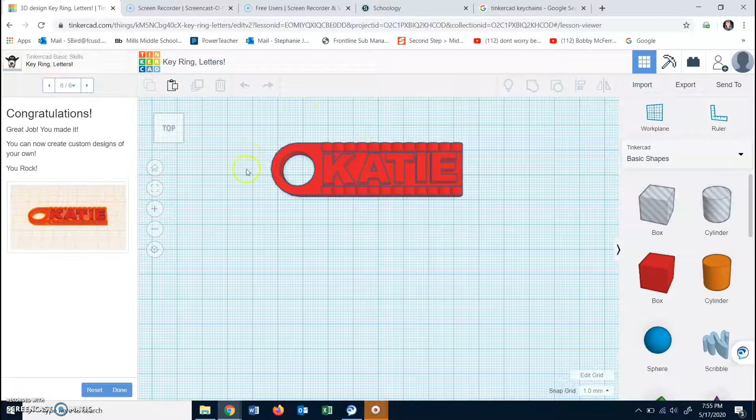And when we made this for the tutorial before, it had the name Katie on it. But I'm going to just, let's see, we'll click done here. I can modify it, or I can start a new one, reset, and work from there.

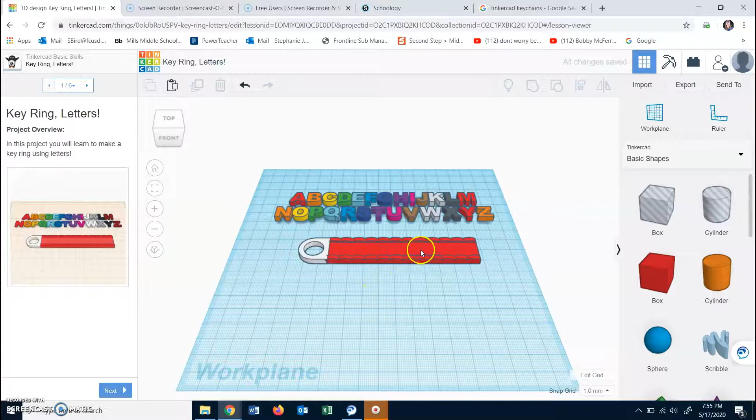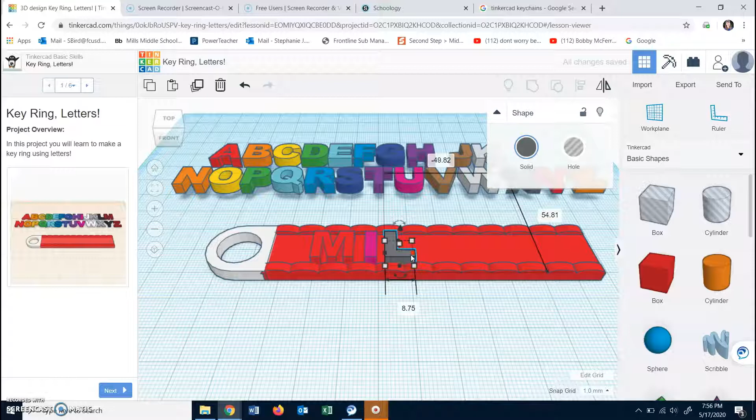So let's say for this keychain, I want to make one for, I don't know, maybe I want to make one for Mills. So I'm going to come and grab the Mills letters, M-I-L. There's only one L, so I'm going to grab another one by saying Control C for copy, Control V for paste. Oops. Undo. Okay.

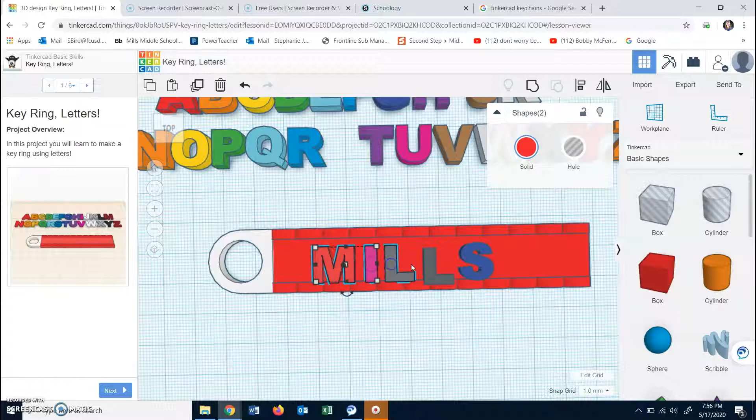Now I want to make sure I center these letters, so I'm going to select them all, and I'm going to click Shift and grab all of them, and I'm going to align them. And actually, there's a way, if I wanted to use the text tool instead, I could make sure that they were spaced out properly, but for this purpose, I'll just keep this.

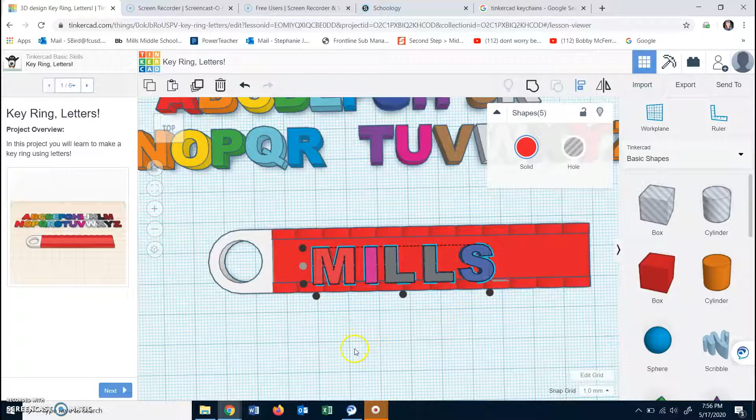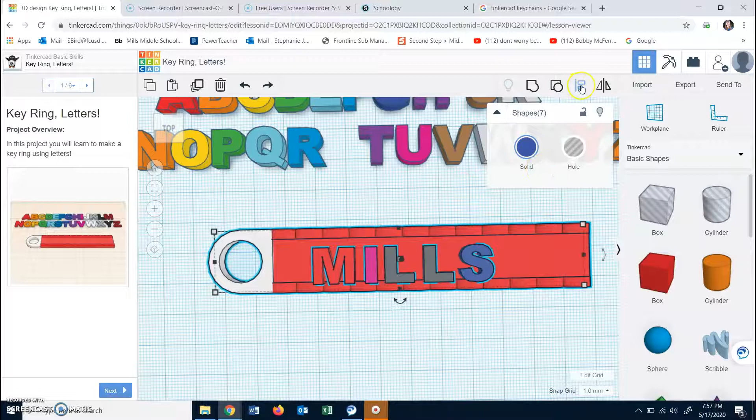I'm going to click Shift. I'm going to grab them all again. Oops. Undo. Okay, I'm going to grab them all again. And I'm going to grab the keychain shape. And I'm going to come up to Align again and make sure that I have them all centered this way, so that my letters are evenly spaced on there.

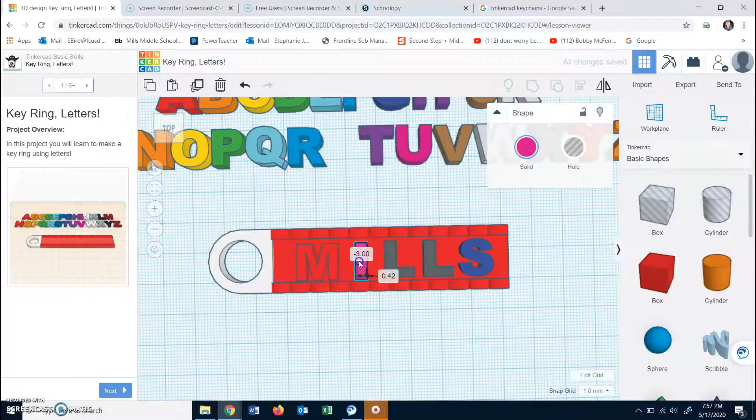I'm going to shorten this. And for this case, I'm going to respace these. There is a way that you can really make sure things are nice and even. Since we're only doing this for 2 weeks, I'm not going to worry about showing that to you. But if you want to look it up on the computer, you are more than welcome. YouTube has so many great tutorials.

So once again, I'm going to grab my Shift button, and actually I'm going to highlight everything here and grab my Align tool and align it back to the middle, so that I know they're evenly spaced top and bottom.

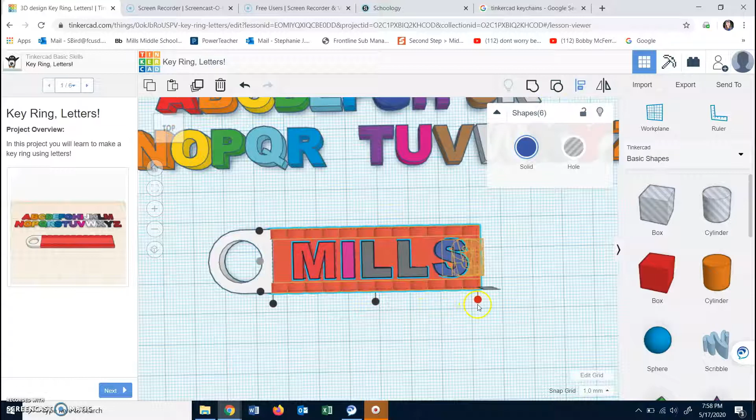And then I'm going to grab all of these letters, and I'm going to use my left arrow just to sort of, actually I can grab this one also, Shift, and I can click my Align tool and I can align it. Nope, I can't do that because it'll move them all to one side. So I'm going to leave it how it is, and I'm going to zoom out and get rid of all of these.

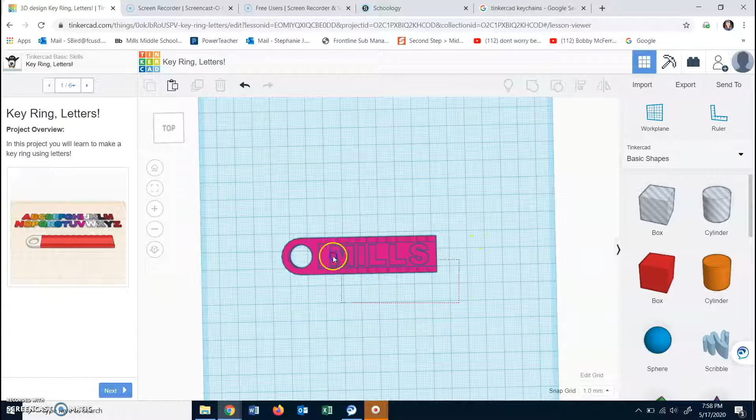Delete, and then I'm going to highlight everything here and group it together so that it's one object. If I look at this and think, oh, I don't like how that looks, then you can just highlight them all and ungroup it. Okay.

And I might decide that I want to add a little border on the edge. You can just totally have a great time with this, making it look like whatever you want. But if you don't have time to completely redesign your own keychain, this is a nice, quick, and easy way to make one using a template that has already been made.

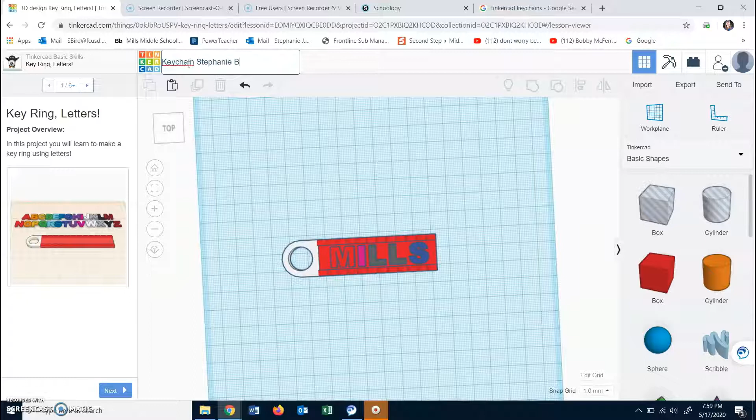Before you go, it would be a good idea to rename the file. So I'm going to come up here to where the file name is, click Change Name, and I'm going to change it to Keychain and my name. And this is my third keychain design, so I'm going to put a number 3 just to keep them organized.